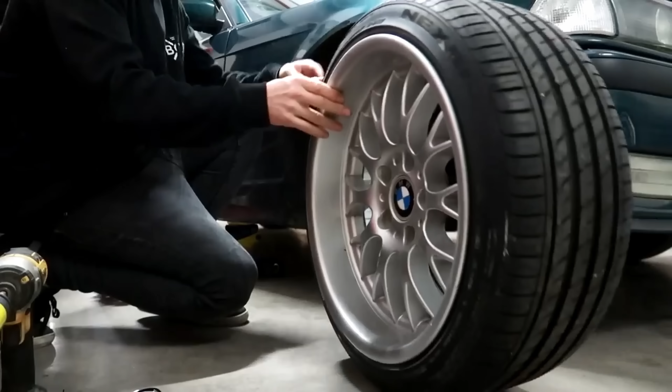This is my favorite car in the world, my E36. When I got it, she was a completely stock, genuine 328 M Sport. We spent a few months changing a few things on it, did some wheels, got a big wing. I made it look how it looks today, and I was very happy with the exterior, but not only was it slow, it also drove like absolute shit.

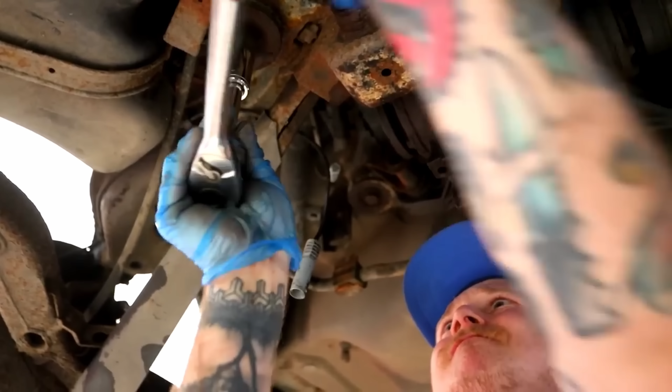The whole suspension was knackered, it was on cheap coilovers, and it needed a complete refresh. So then began a huge journey to completely refresh the car, but also to do something I've always wanted to do, a big fat V8.

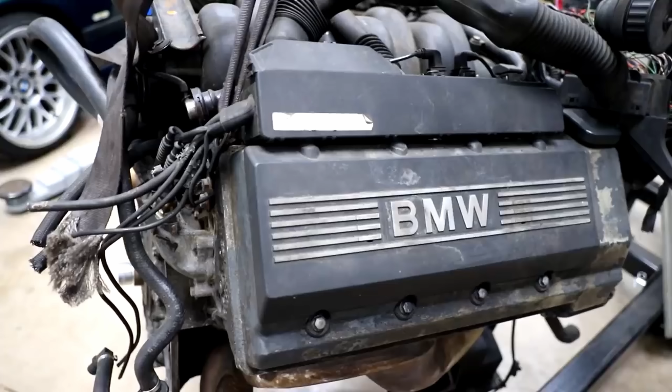We secured an M60 B40, which is a 4-litre V8 from an old 7 Series, and we started the swap. We stripped the whole car, did loads of rust repair, undersealed it, and fully rebuilt it down to every last nut and bolt. So now everything underneath is brand new.

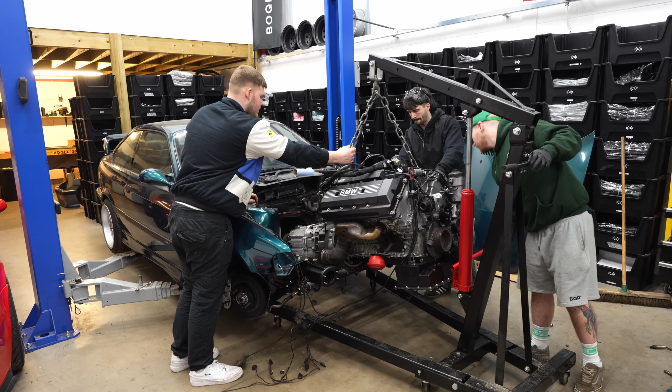But 3 years into this project, not a lot had happened, and I was getting pretty sick of my slow progress, so I set a deadline. We're gonna get the V8 on the road in 3 months. April. Here we are, 3 months later, and lots of work done. We got the V8 swap running.

Today, we're gonna drive it. This is gonna be the day that we start driving this, hopefully. Fingers crossed.

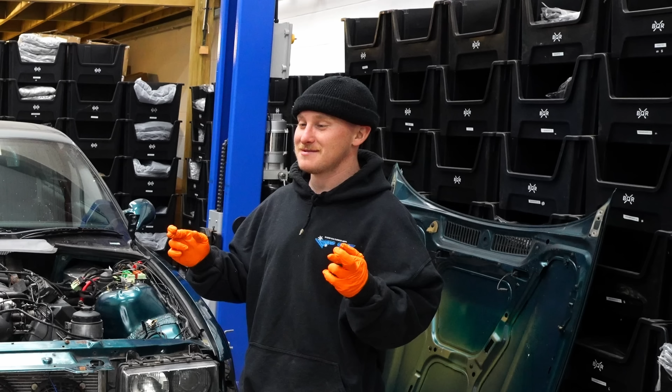First thing we're gonna do is we're gonna put the front end together. I wanna make this look like a car. Yeah, that'll be satisfying. Little victory, so. Let's get the front end on.

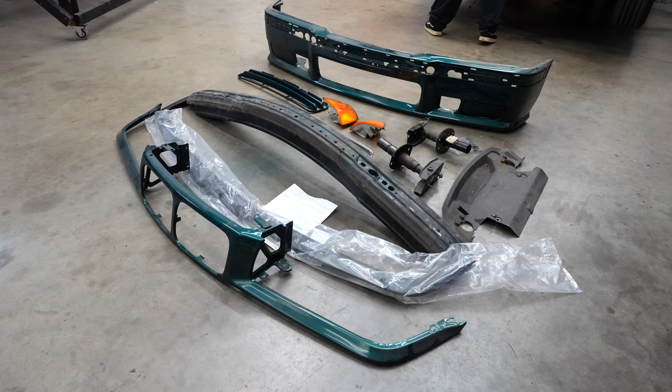This is everything we have to make the front end complete. First step is the nose cone. If a lot of you remember when I first got this, I converted it to pre-facelift because I prefer the kidney grills. I did have this really dodgy, non-OEM nose cone, but since then I bought an OEM one, had it painted. So we've got a nice freshie.

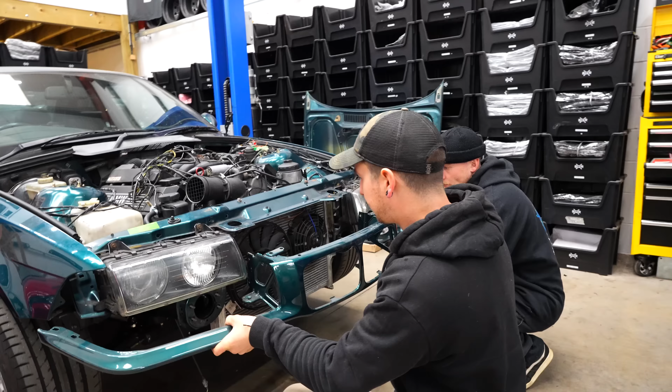Inside like that. That goes in there, doesn't it?

So I think we've got to take the headlights out to get to the bolts in there. So I'm just going to whip these off.

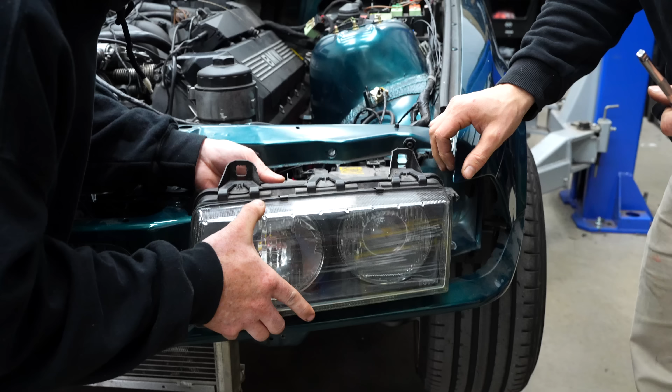What is it, 12-hour non-stop ratcheting sounds to fall asleep to. Imagine first time sleeping with a car guy. No, is it sorry? I just can't get to sleep. Babe, let me just put this on. That's solid, decent, I ain't going nowhere. Headlights back in.

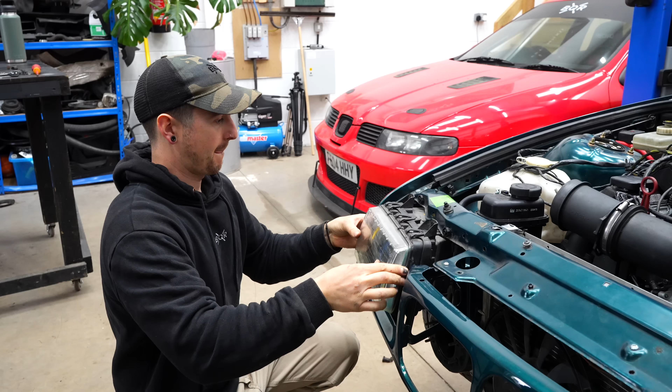E36s are so notorious for snapping indicator tabs. Yeah, like that, yeah.

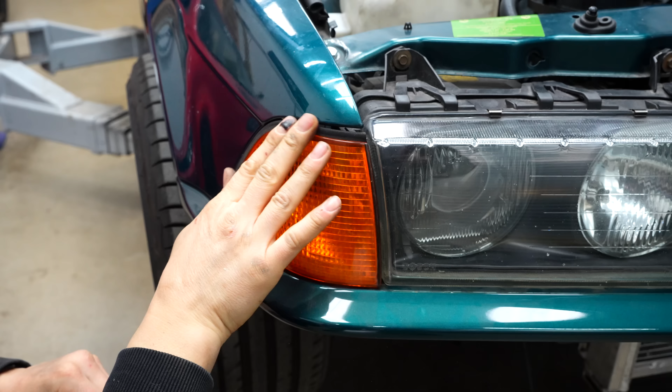Take a look, take a step back, have a look. You can almost visualize it, can't you? Yep, bumper and grills.

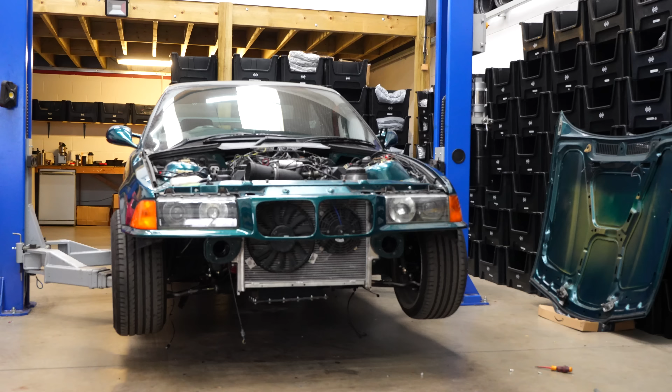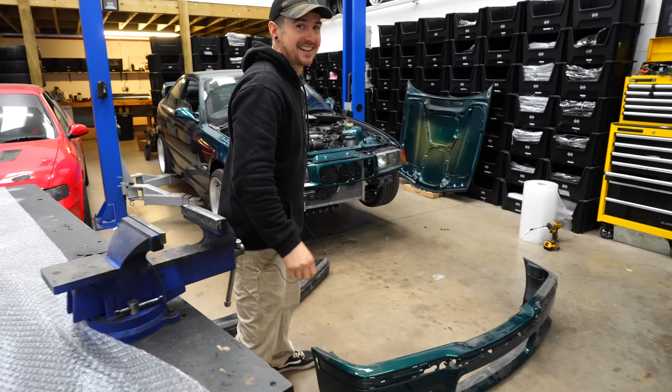This bumper, honestly, is another one of those bumper sagas, isn't it? When I was first learning to drift, and when I first bought this car, I crashed it like 3 times. Every single time, smashed up the front bumper. So this thing had a lot of damage.

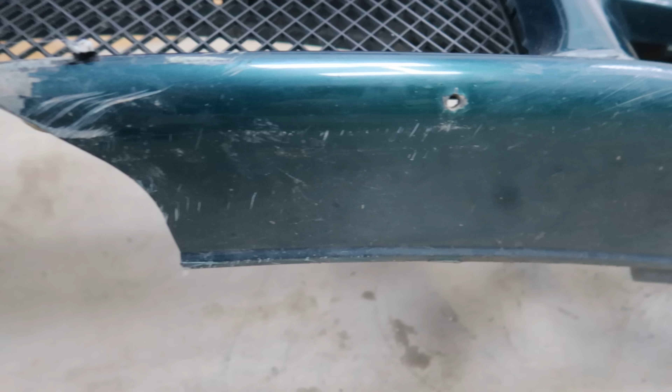I ended up sending it off for paint, but he did a load of bumper repair to it as well. If you come around here, look, this whole section here was missing and cracked, so he repaired that. There were massive cracks down here, so he's plastic welded all that.

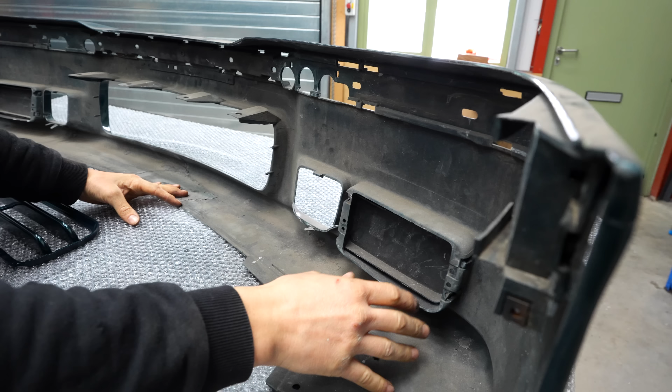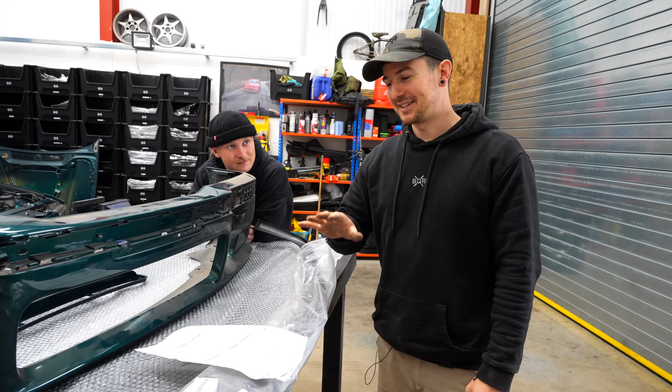This was just totaled, so this is brand new from BMW. My splitter was totaled, brand new from BMW. The bumper repair cost me 450 quid with paint. That slat was like 80 quid. That's 70 odd, I've had loads of clips.

This is just one of them things, it's just been such an expensive project, but I think a front M Sport bumper is one of the best looking things.

So first step, this is what we painted last week. So we've got to get this on.

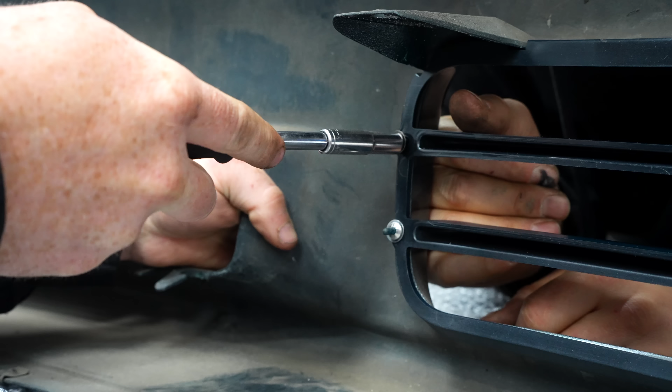Nice, very nice, that piece done. Next is the crash bar. I think it's gonna go.

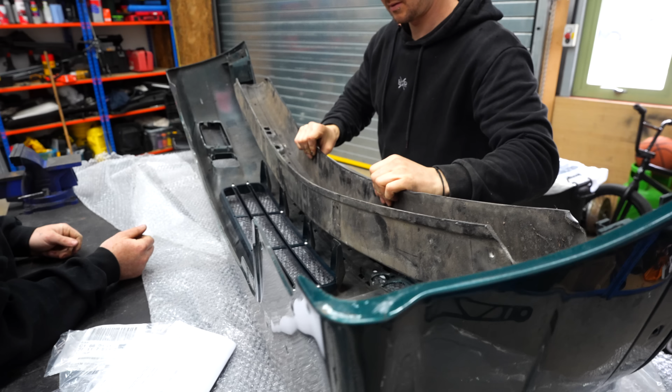Oh, lovely. Oh yeah, I've seen, that way a bit, yeah. Oh yeah. So now we got the crash bar, we're gonna get the splitter on.

So, because I've absolutely destroyed the bottom of mine, it's not gonna fit to OEM. Ooh, I don't know, that's quite nice, not awful, all of these. We're just gonna drill, nut and bolt.

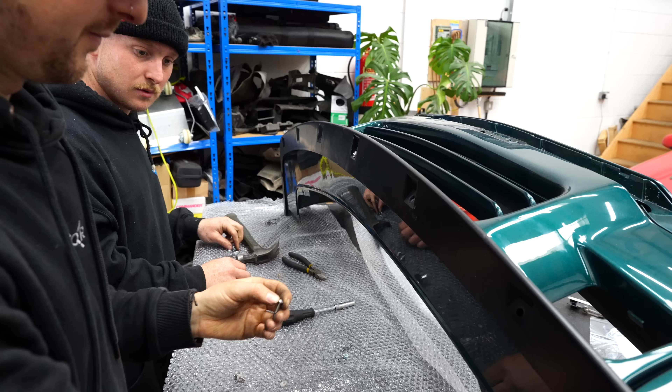So holes there, we're just going to go in with a nice little countersunk Allen key. Look how tight that's gone, got a gap there, lush.

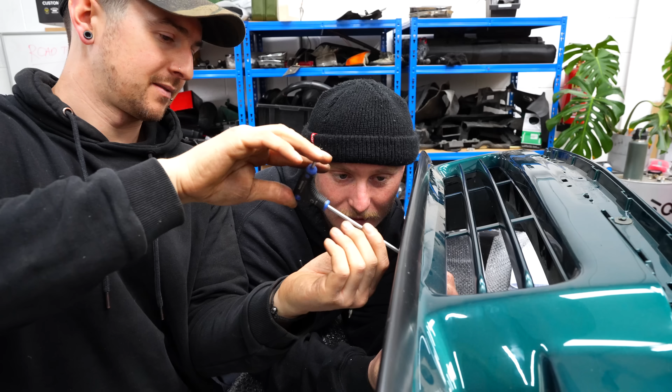Right, do not crash this one. Touch wood, touch wood, yeah, go on. All right, then we're just going to drill all the rest.

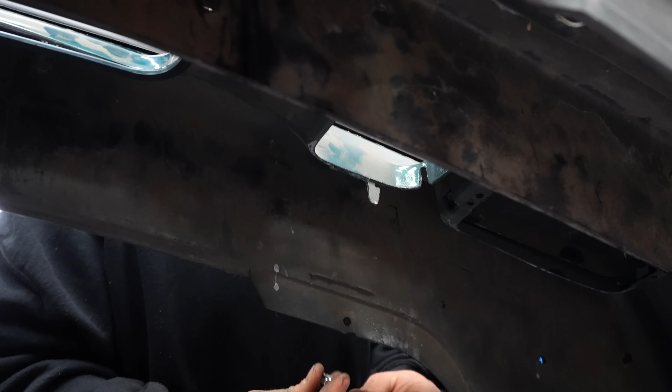Oh my god, my hand cramped.

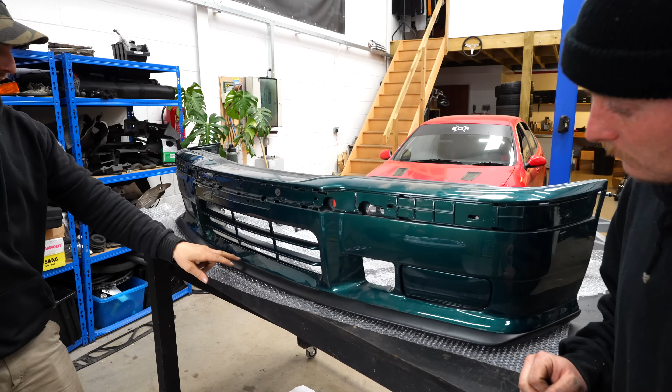Dunzo. It's going to look unreal. Look how nice that line is. Not bad at all. Brilliant.

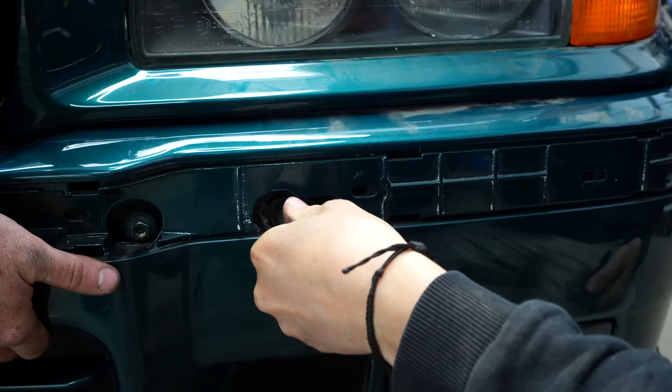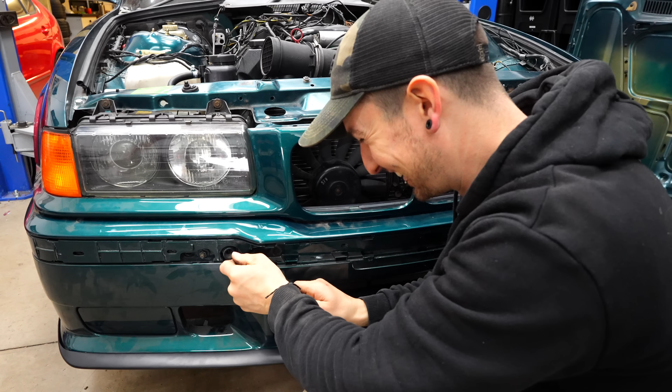I've been waiting for this for so long. Oh my god, it looks so good.

Oh wow, you hungry? Yes, you hungry? Salmon, yeah. Should we do some lunch break? We're just gonna do a quick little grilled cheese, or toasty, as we call it in England.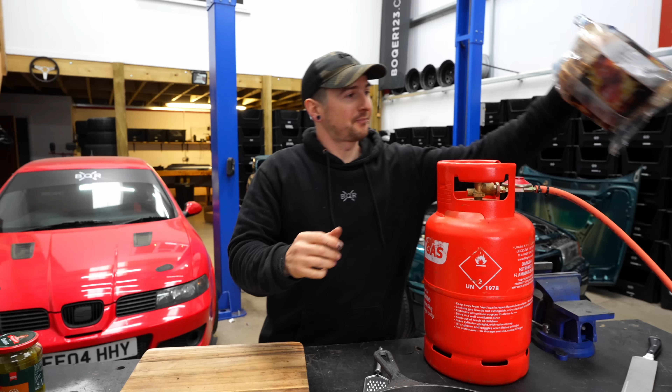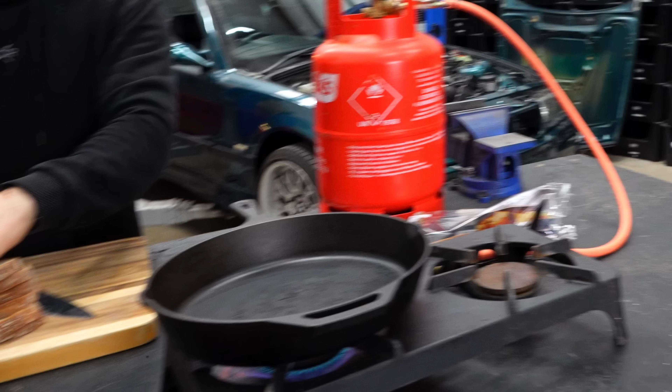Sourdough, cheese, ham, pickles, done. Easy money. No, I literally went like - I was going to do the block of cheese as well. You're lucky, get knocked out. I looked up and it was coming like, yeah, that just frisbeed lush.

So how to make a really nice toasty or grilled cheese. Get some nice sourdough, Dijon mustard and mayo, do both sides.

Bit of mustard. People who can't make sandwiches, do you know what their number one crime is, I reckon? They don't spread all the stuff to the edges. So then every bite of crust is dry. We don't do that around here.

Not around here, partner. Go on with some ham. Pamela Anderson. Go on with that. And then...

Jesus, yeah, they're Christ, they're big boys. Look at the size of them. They are some big boys.

Thin slice. What you want in a sandwich is like a nice mix, don't you? Cheese is really fatty and dense, and then you want a pickle to balance it. You just want a bit of acidity, a bit of crunch, a bit of saltiness.

Cheddar cheese, just go nuts. Cheese placement is key, like I said, dry crusts the worst. I'm doing a bit of reconnaissance, tap the edges, you know where they are. Fill it up, mayo on the inside.

Close that, close that. You can butter both sides so it'll make it brown, or you can also use mayo because it's a similar sort of thing. Mayo does a good job of it if you can't be bothered to buy butter. Yeah, 'cause it's got the mayo on it.

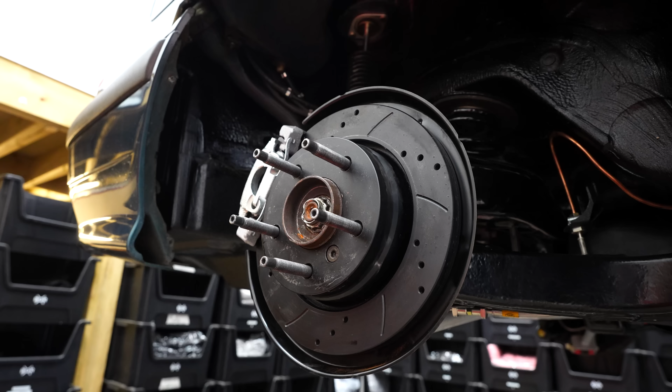We've got a prop. Prop's done, shifter's done. We're just going to bleed the brakes quick whilst all 4 wheels are off. We did it mostly the other night, so we've got loads of fluid in it. I'm just going to get the last of the air bubbles out, and then we should have brakes and a clutch.

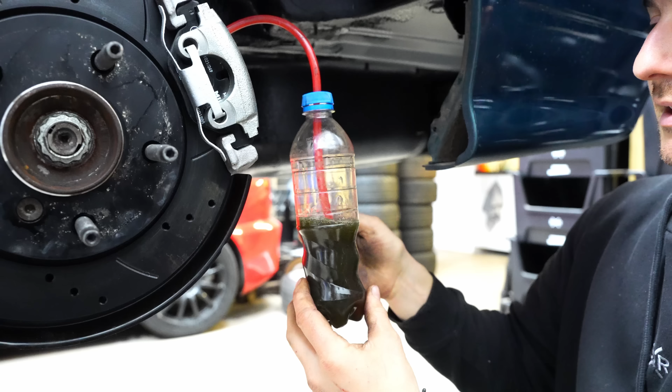Hold in. Yeah, nice. Lush, no more air. Right, there's no more air. How's it feel? Good, good. Like brakes? We've got brakes? We got brakes, we got brakes.

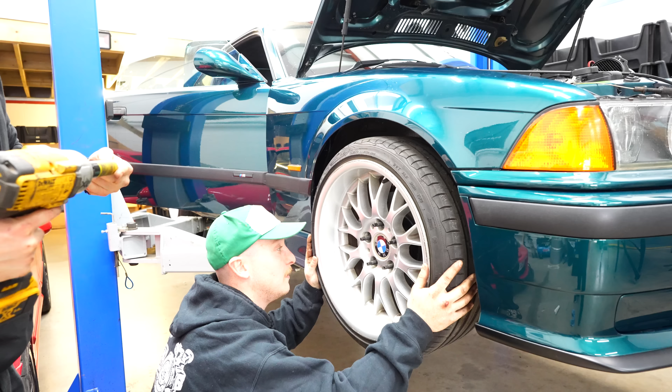Another thing we did last night, we lowered it a bit more as well because the front was very high. Andy's coilover master, ain't you? Something like that.

Yeah, that's much better, isn't it? I think it still needs to come down a bit more, but that is better. That's nice.

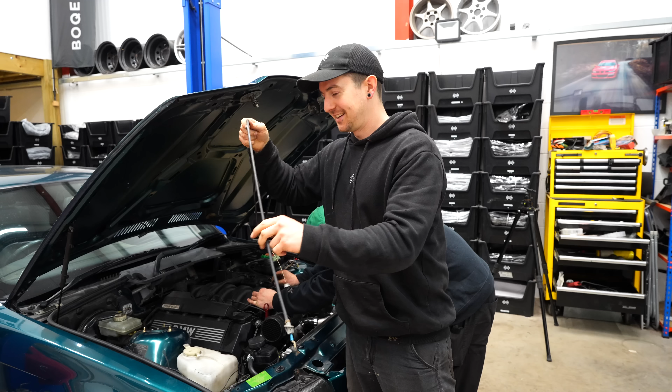Next thing we got to do is this. This is your throttle cable. So we're basically just trying to figure out a bracket to run to hold this. It's actually throttle body, so we need to attach the cable to there, so when you press the accelerator, it does that. It's going to come through there, like that, and sit in there. So our problem is, this is a throttle cable bracket, and that hits our bonnet, so we can't shut the bonnet. So these two are the mounting holes. So if we ovalise them upwards, we should be able to drop that bracket down a bit.

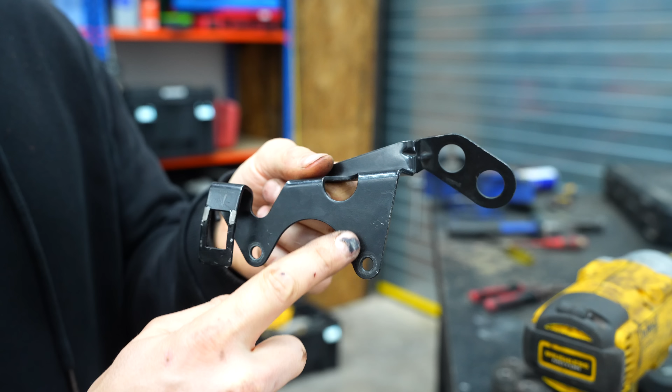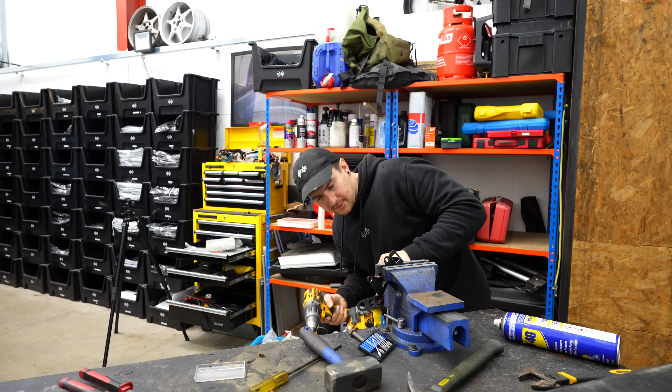Just like that. No, so hit it. That's the gap. We could actually lob a lot of that off.

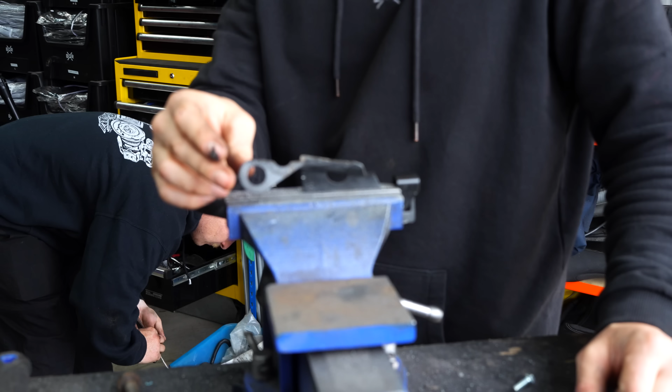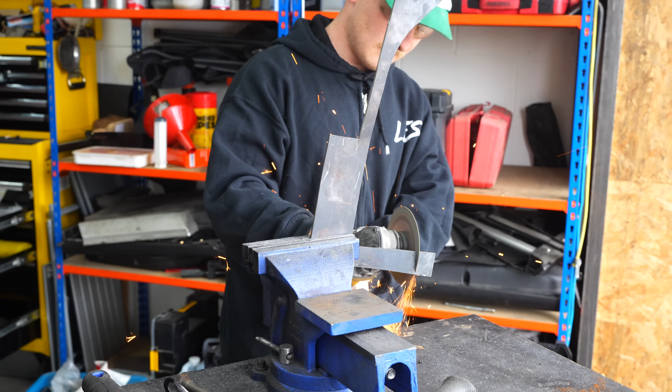Nice, oh my God. We had to shave the bracket down quite a lot, so now it's really thin there. So it's got quite a lot of flex on that, and that will just feel horrible on your throttle, like on your accelerator pedal. So we're just going to reinforce it with a bit of metal. That shouldn't break now.

Well, we've got our strengthening plate in. Also ran out of black spray paint, so I've just primed it for now, and then we're going to get some black and sort that out another day.

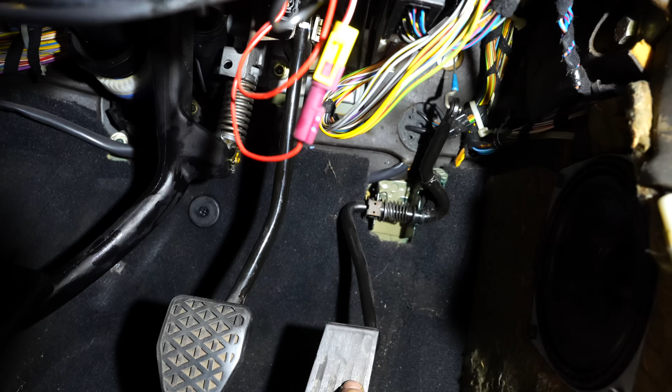This end is going to go down that hole. Oh, I see, yeah, down there. Nice. All right, if we come in the dash, there's the cable. That cable is now hooked up to that pedal, which goes down there. See that? Yeah, it's about adjusted up.

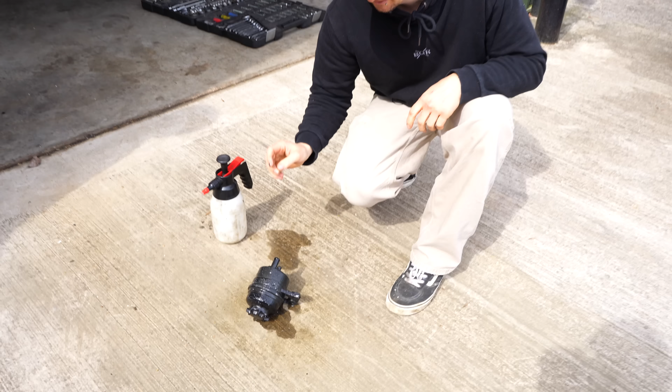What is this? One of the last major systems now? Yeah, power steering. It's a power steering system. This is our reservoir, and it's filthy, so I'm just going to give it a little clean. Last system to go, and then we should be able to drive this.

Prop, order and fit, take that off. Throttle cable, done. Clutch slave and lines, done. Put front end back together, done. Build front end, done. Shifter, done. Right, power steering lines. Okay, 3 elements of the power steering system.

You got your reservoir, which is going to hold your fluid. You got a power steering pump, which is driven off the engine, which pumps around the fluid. Then you got your steering rack, so this steers your wheels. We're going to have a line running there, that's going to feed the pump. Then we're going to have a line running there, that's going to feed the rack. And then a return line to go back to the reservoir.

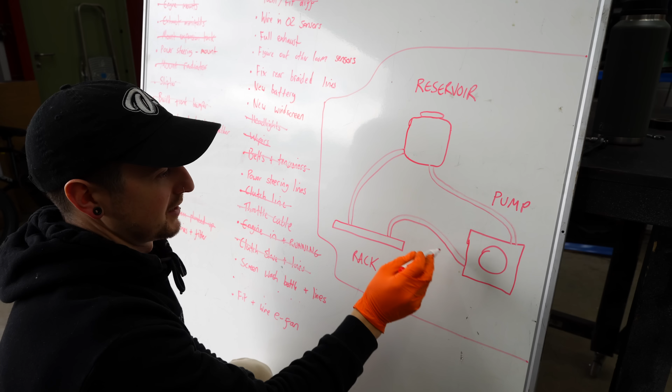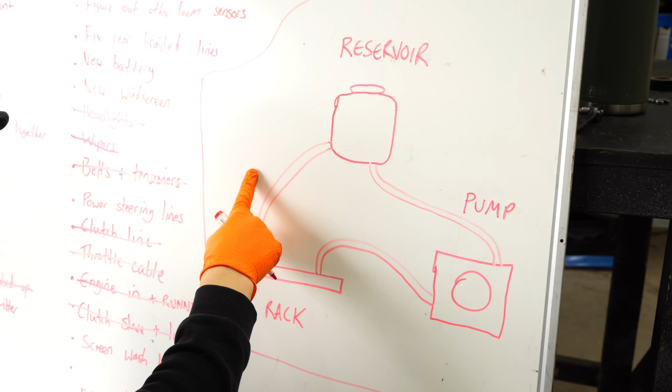This one here, that's your high pressure line. So that's going to be from the pump to the rack, and that's going to be super high pressure. These two, not so high. So we're going to do these two low pressure lines out of just normal hose, and then we're going to do this one out of an AN line. Yeah, so that's like an AN thing. So we're going to make our first AN line together as a group.

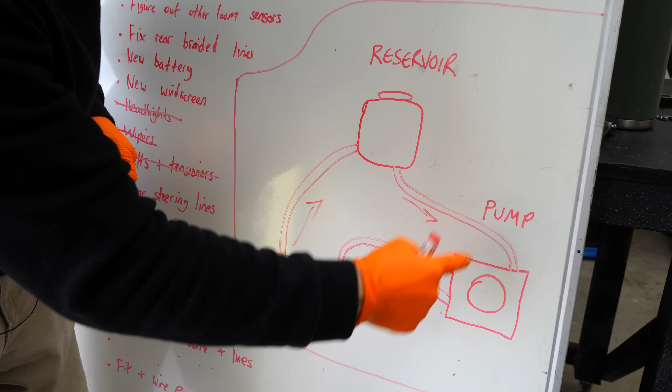Yes, sir. But yeah, so the flow goes that way, so it goes like that. And then it's just a loop. Did you get it? Do you now understand power steering systems?

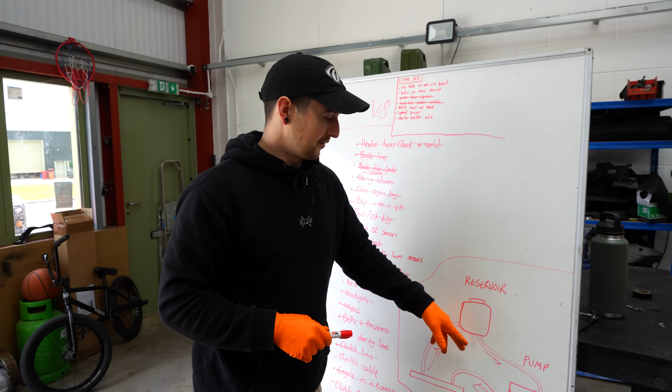Yeah, spot on, easy. All right, so we got 3 lines to make. But the first thing we've got to do is mount this reservoir and find a place for it in the engine bay, because we can't run any of these lines or figure out lengths until we know where that's going to live. So step 1.

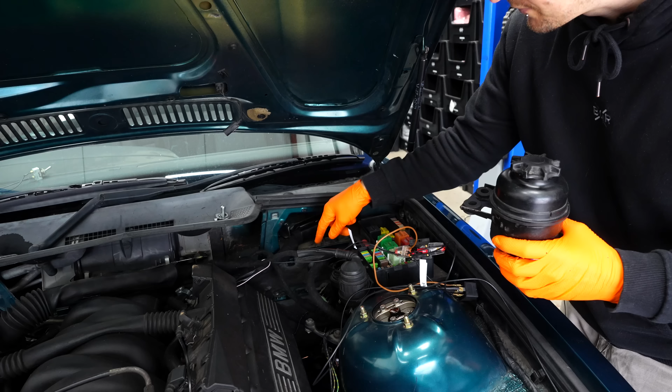Give it a home, give it a home. Power steering reservoir, all cleaned up. And we've picked a spot, so they've got these 2 rubber mounts back here. And we're gonna basically just mount it back here. And there's a hole there and a hole there, so this is gonna basically go.

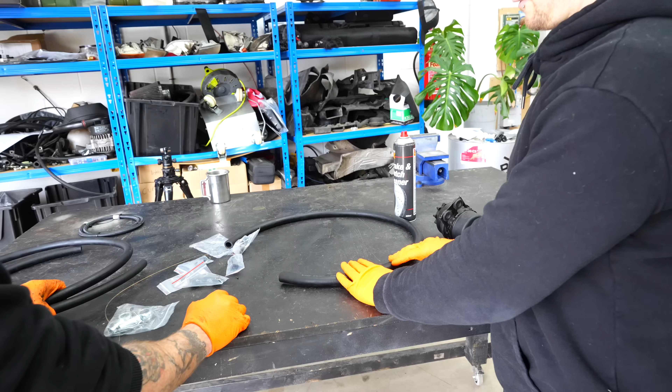Like that. Oh, nice, yeah. Yeah, so we just need to bolt that up. Fat hose, low pressure. Smaller hose, low pressure. AN line, high pressure. So 3 lines.

And basically what we're going to do is put a little one there on that one. Like that, look at that technique, like that. You got a little twist on it. Look, I've got a barb on the end. I'm going to take this, I'm just trying to work out where they want to route. That's the route, yeah.

She's bloody mounted. Lovely. Banjo with the barb.

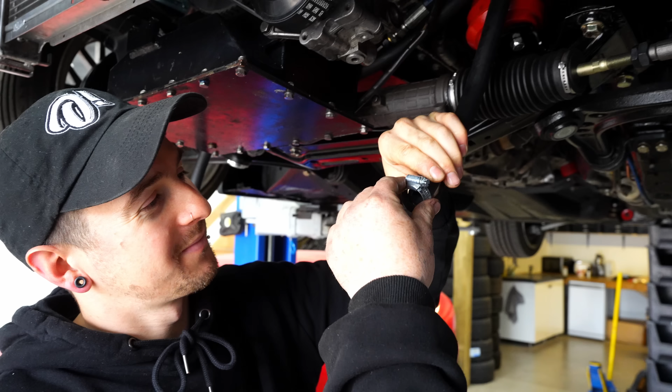That's your banjo bolt, two brand new copper washers, one either end. That's going to go in. Sweet, that's line 1, one out of three done.

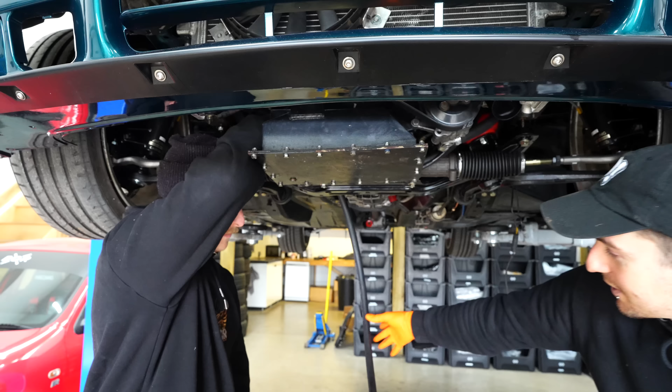This is the other hose, this is the return, so this is going to return back home, to the rack, to the res. We've just done that one, and now we're doing this one.

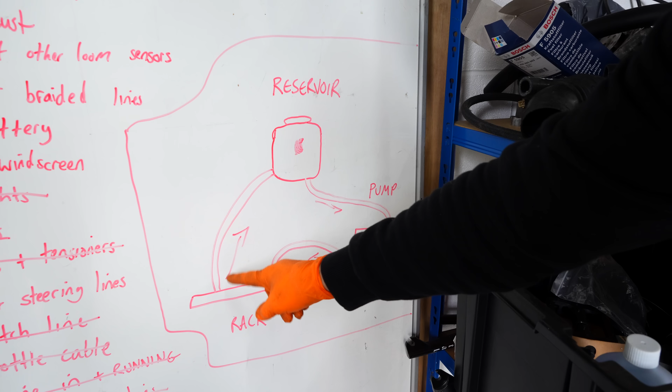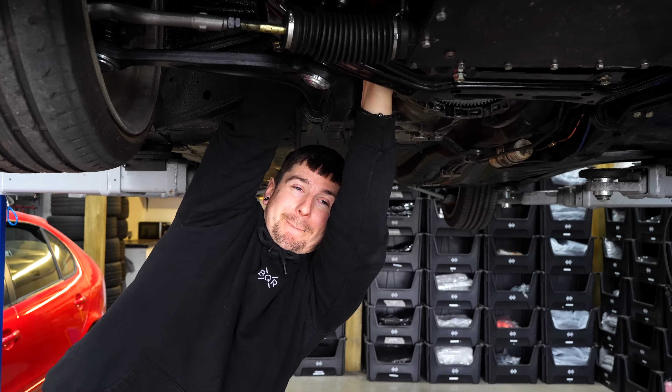Tight does not describe that. The other one's even worse. Tight, like tiger. Whew, line 2 done.

Nice, so this is your AN line, PTFE. This is rated to like 2,500 PSI, so this is like the high pressure line. And then this is your AN fitting. So we've gone for -6, and we're gonna figure this out.

Bit of lube. That's gonna go. That's it, well, that's on there. This has got thread in it there. And then we're just going to push that up and over.

We're good? Yeah, sweet, one AN line, our first one, let's hope it holds. This side we've got a 90-degree AN fitting, just because it's going to come like and sweep round. So same again.

Not the prettiest, I've scuffed it up a little bit just with the spanner, but hey, not bad for a first. We'll see if it works. So in there, I've got this, another M14 to AN.